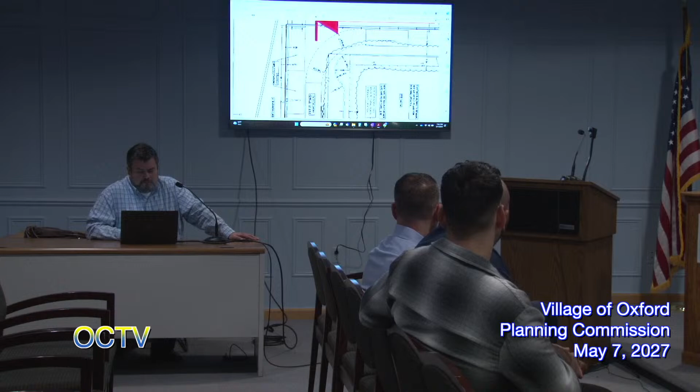So Joe, the bump out to make the turn, is that because of the narrow space? I apologize, we didn't send this to Paul - he didn't hear about this meeting until today. Initially when I first saw this come through, I didn't think it was anything about the drain, and when Myron noted it in the letter, we needed to get hold of Paul from Rowe today. He wasn't able to visit the site specifically, and he sees the dotted line as a delivery truck coming around to the staging area. He said it's obviously okay to make that corner, but he wasn't positive without seeing it or seeing those dotted lines whether they could come around there and make it into the drive. He said he can't say for sure, just looking at the drawing - that was his concern.

It may not be necessary if that curb and bump out are already there. Since we're on the property now and driving it, I actually think that would work out a little better. It gives the driver a bit more leniency, not having a tight turn right against the building - it gives them that little bump out to come back in. His only concern was, because he didn't have time to visit the site, whether you could come around that corner and cut back in. Looking at it, it seems reasonable to me that you could.

There's more than enough space. But isn't that where your garbage can is? Your dumpster? Well, the garbage can's more tucked in the corner, all the way up to the top left.

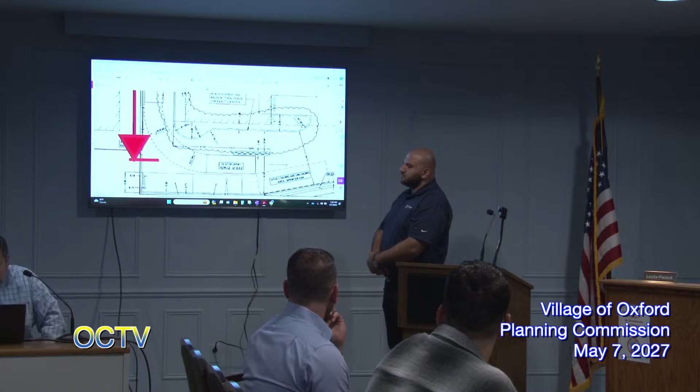He asked you to point out where the car stacking would be, from the driver. So our pickup window is proposed right... sorry, I'm just trying to give you a scale of a vehicle. I have the wrong scale, sorry, I was just trying to give you a graphic of what a normal car would look like. But on the graphic, you can see, it's hard to see, but this is about 19 feet right here, so a car length is about one length of that curb line.

So that's actually the proposed pickup window right where this arrow's directing towards. So that's where the first car stacking would begin. After that, the second one would be right behind it. I don't think we'd see a third one until we kind of turn that corner. So I think we're only gonna be able to stack 2 cars before we turn that corner, and then so on, we'll stack.

You don't have people creep up there? Sure, like I see it in curbsides all the time. I was at Tim Hortons the other day. Yeah, what I'm saying is I don't think you'll fully see 3 cars.

So in my simple mind, they're going to call ahead or contact you in some way. No, they place the order online first. That's what I'm getting at. Yeah, the order's already placed. They're there just to pick it up. Is the order paid for? No, they pay for it then.

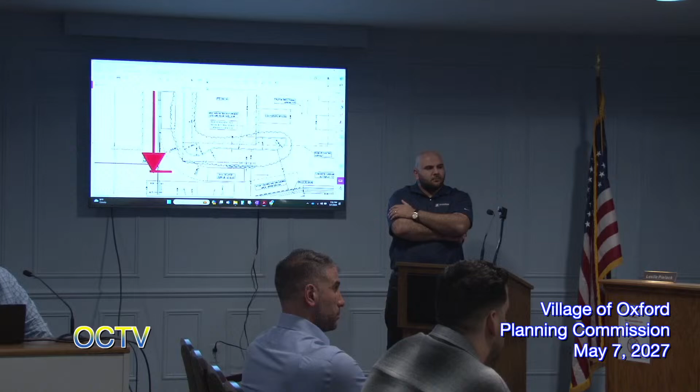Okay, so in the queue or in that stacking, you're gonna have an exchange of payment and the item they're buying? That'll happen right at the pickup window. It'll be an easy transaction, the consumer will provide their ID as they're checked in. There's an ID scanner right at that window. ID will be scanned, once that ID is shown as valid, the bud tender will give them their total for their order and receive that money. So the chance of a person sitting in a car and saying, I want item B or C, no, I want D...

My question to Mario is, the bypass lane, is that an ordinance requirement? The ordinance does require that, but it also states the planning commission can approve any alternative. In a best case scenario, we'd have a bypass lane across the entire length of the ordering lane, but with the size of lots we have in the village, that's not really practical, and not a lot of our drive-throughs have it. Is there a variance for that? No, it wouldn't be a variance, it would just be if the planning commission feels the configuration as proposed is appropriate and meets the factors.

Because in this case there is eventually a bypass, and if they feel 3 or 4 would be the max amount of time someone's waiting, I don't see a bypass issue because of the way the business is being conducted. The business is already done, they're just there to pay and pick up quickly. Knowing that information now, it's more indicative that the use will operate more efficiently and effectively, with less probability of any kind of stacking.

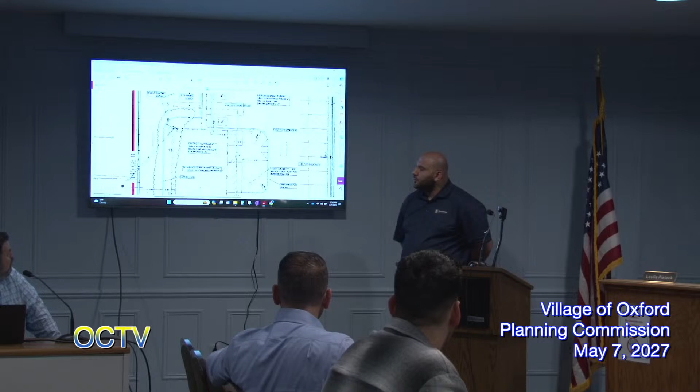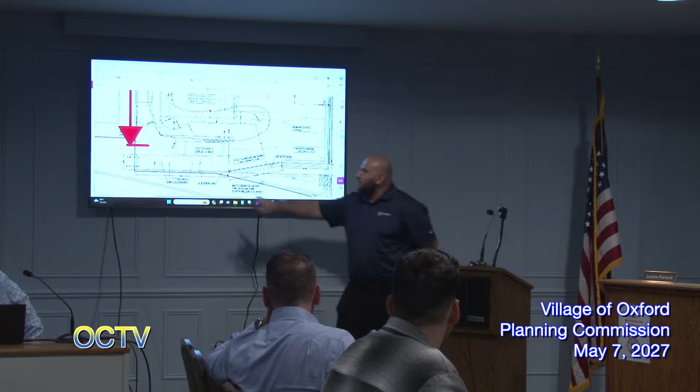Well, aren't you losing 2 where the window's going in right now? Or no, they're on the southern edge. So you're losing 2, right? Well, in theory these 2. Yeah, there's 2 right here. Yep, these I believe are used as employee parking, and then there's a loading dock right over there. So you're losing the top 2 where the window's going, 2 of the windows right against the building, which we still have now.

2, I believe we'll now have 26 with 2 handicaps. That seems like an absurd amount of parking. It is, more than enough. It meets the standard for handicap as well. They used every one of those spaces.

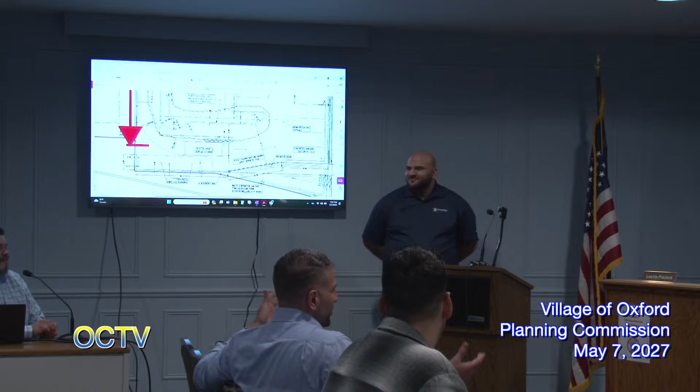That's kind of how, from a planning standpoint, we used to do parking standards based on Christmas Eve, and that's why we had a sea of asphalt parking in front of a lot of stores. That's why those parking standards are no longer done. You don't pave an entire lot just for one day out of the year.

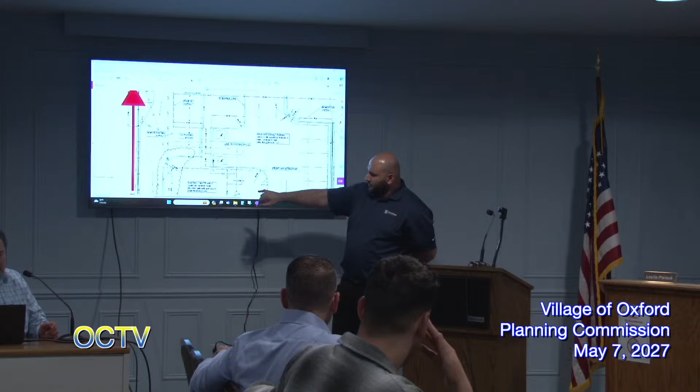One last question, it was a little hard to see on these documents - is there any additional lighting? No additional lighting at all. We have a light pole right over here on this side of the property, and we also have one there. Is that existing or was it never installed? I think at the window, are you gonna have a spotlight? That's gonna be part of the building drawings, the architectural drawings we'll have.

Because we're gonna need an awning too for rain purposes - rain, sleet, snow. Should only be a camera going straight. There'll always be a camera. There's a camera on every square inch of the property. But there is lighting on the backside of that property as well, wall mounts and the light pole.

If you have a camera now, then you will have seen me drive through there about 3 times today. I'm not kidding. Oh, you're checking it out, Joey, if you wanna place an order.

Okay, I think that's all I have. A couple housekeeping things I just wanted to bring up at this time. We do have a letter from the fire department, they had no issues. We do have a letter from the village police department, and they did not have any issues. They had already talked with the applicant in regards to this.

I spoke with the Chief today, yes, we had a great understanding on how we're gonna go about this. Told him that we're looking to work with the village, have been since we broke ground. Great job with Joe as well, the building department, everyone's been great with us. So we're looking to continue that relationship together. The chief and I have a great understanding on how this whole process is gonna work, and he said he believes this is a safer route than traditional curbside.

So I am a little concerned about the late letter we got in from Rowe Engineering. They talked about curbing, they talked about stormwater management in that bottom corner. I know that's a very low corner on the east, south side of the property. I know that's an issue. Where do we go with this?